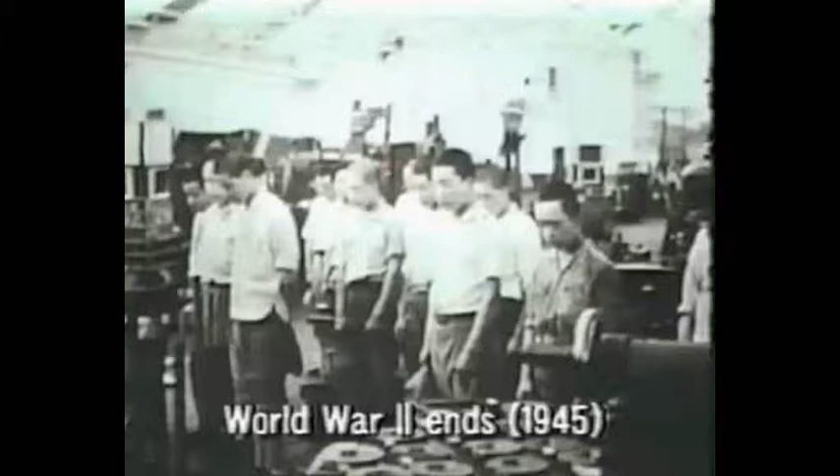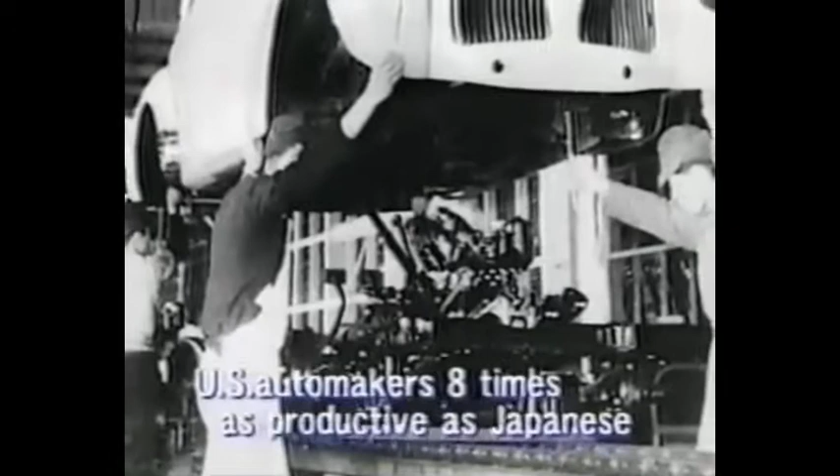After the war, Kiichiro passed on his dream to his cousin Eiji. He instructed Eiji to bring the company up to U.S. standards of technology within 3 years. That was a daunting task. U.S. productivity in automobile manufacturing was 8 times higher than Japan's, and Toyota was short of equipment and capital.

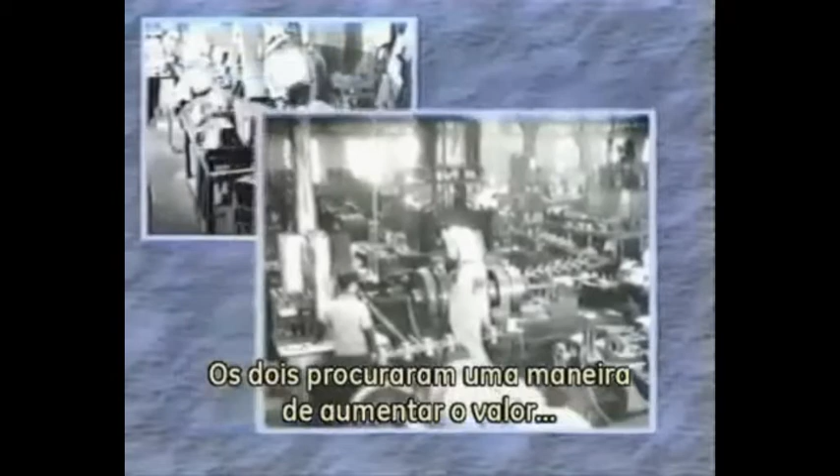So raising productivity was a pressing issue. Eiji assigned a machine shop manager by the name of Taiichi Ohno to develop a more efficient production system. The two men looked for ways to raise the value-added productivity of every worker. They did that by putting Sakichi's Jidoka concept to work throughout their operations.

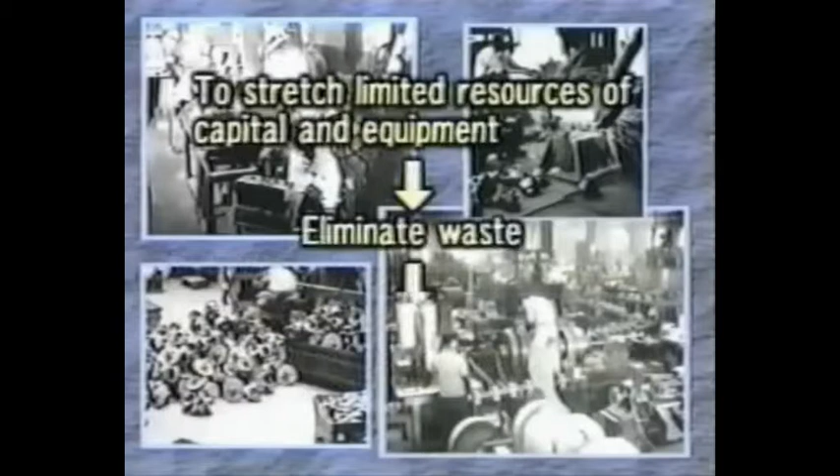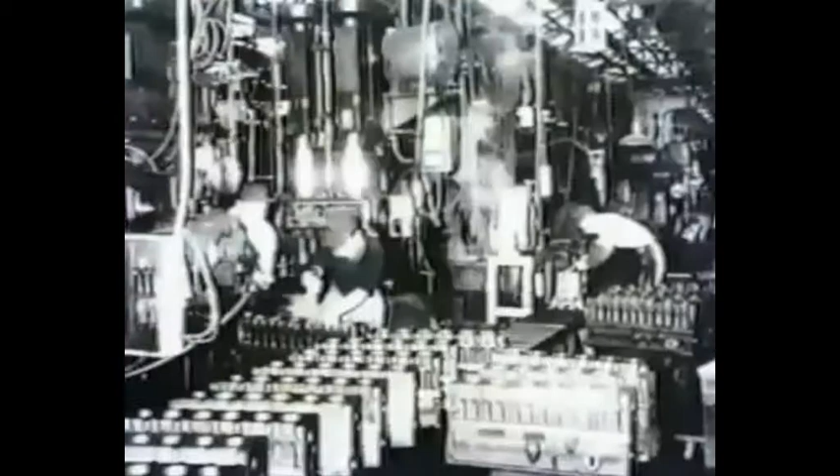They also looked for other ways to stretch their limited resources of equipment and capital. They did that by putting Kiichiro's just-in-time concept to work systematically. Ohno took a cue from the U.S. supermarket. He made each process the customer for the preceding process.

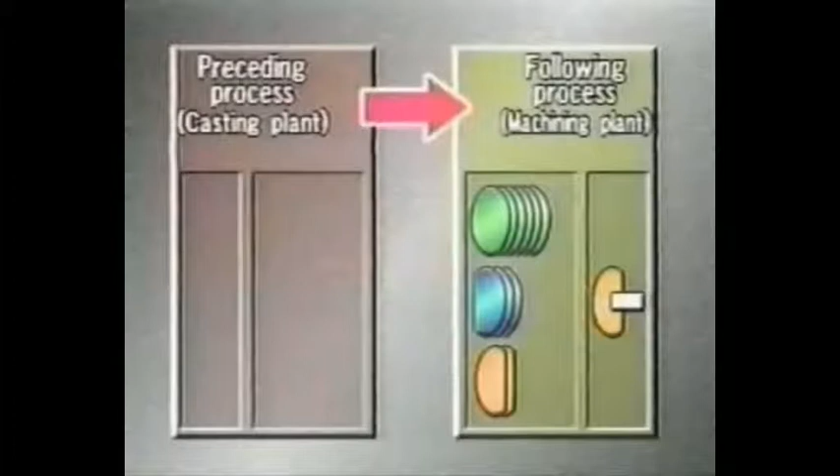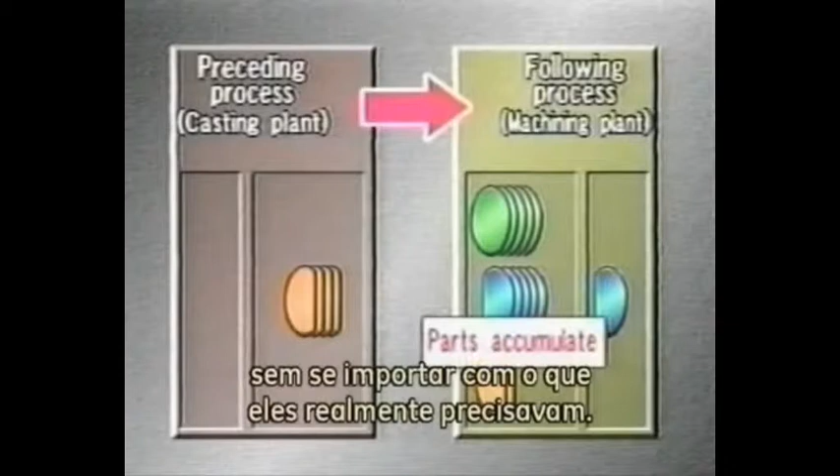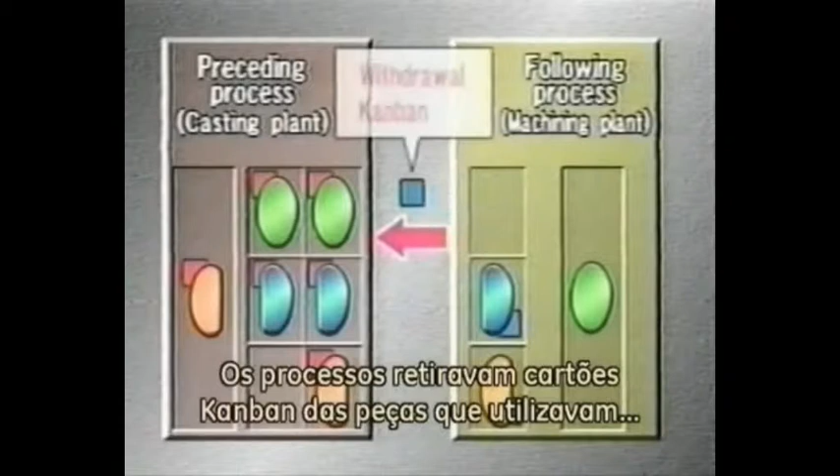In traditional manufacturing, processes delivered parts to the following processes regardless of what was actually needed. Ohno devised a completely new kind of system. Processes used Kanban cards removed from parts they had consumed to withdraw parts from the preceding processes.

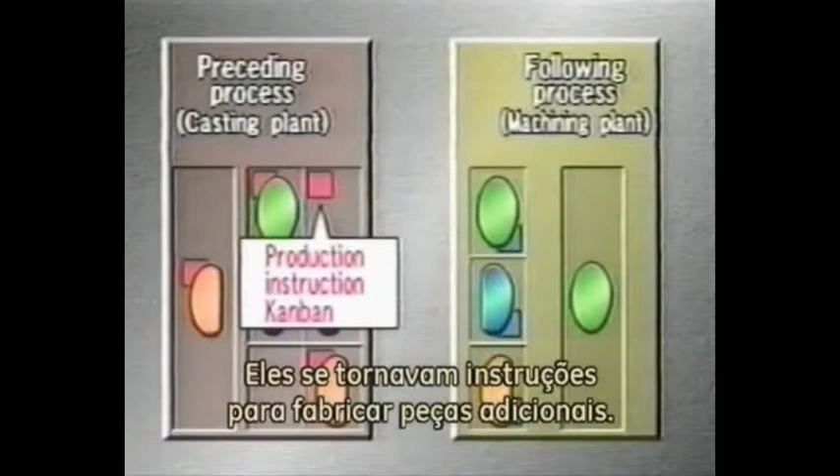Kanban on the parts arrayed by processes came off when the following processes withdrew the parts. They became instructions to make additional parts. The Kanban flow ensured that processes made parts only to replace parts actually consumed by the following processes.

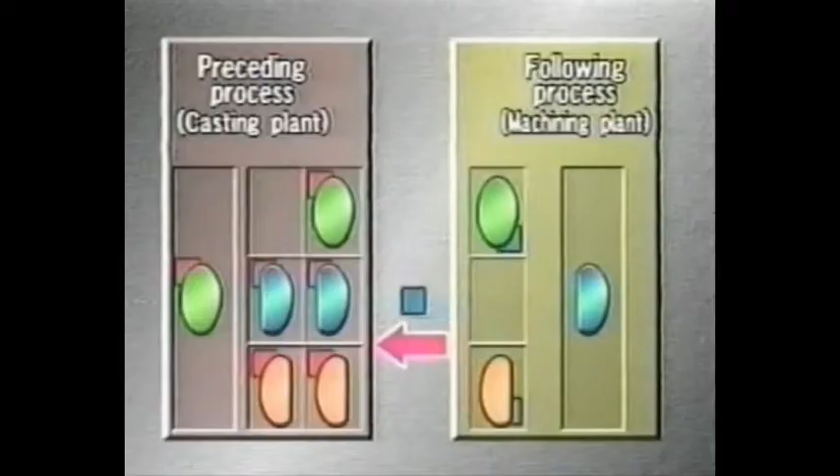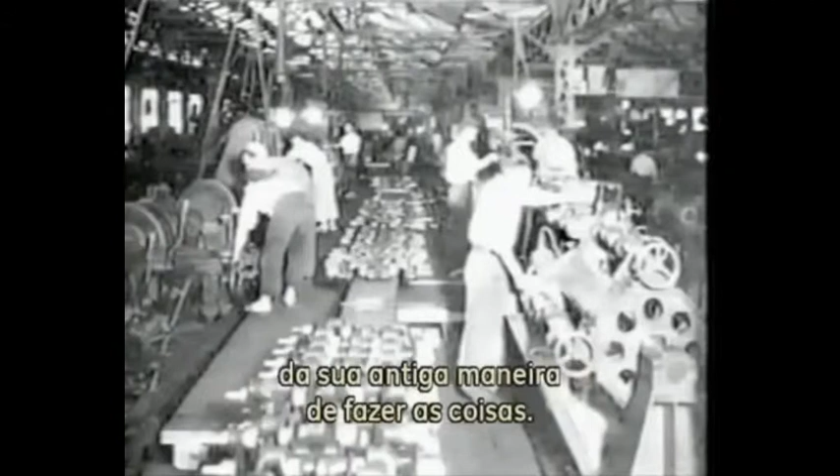Active cooperation by the people in the workplace would be essential to Ohno's system. But at first, people were reluctant to give up their old ways of doing things. Ohno took the initiative. He went into the workplace and taught people how to use his system. Eiji Toyota supported Ohno enthusiastically in putting the new production system in place.

A new production system gradually took shape on the foundation of just-in-time manufacturing and Jidoka intelligent automation. As the Toyota production system, it became a standard for manufacturing industries. The Toyota production system gained global attention after the oil crisis of 1973. Toyota recovered more quickly than other automakers from the crisis, and its production system received much of the credit for that resilience.

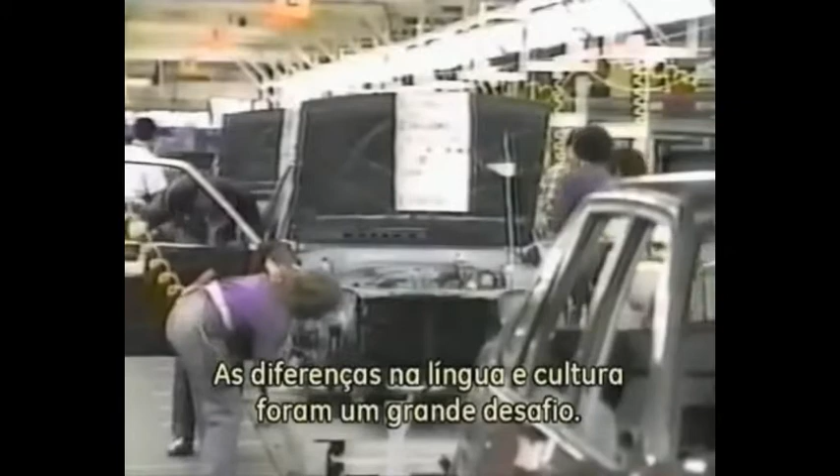General Motors Corporation approached Toyota about setting up a joint venture to make small cars in the United States. The two companies set up New United Motor Manufacturing Incorporated in California in 1984. Differences in language and culture presented big challenges, but the spirit of making things well knows no borders.

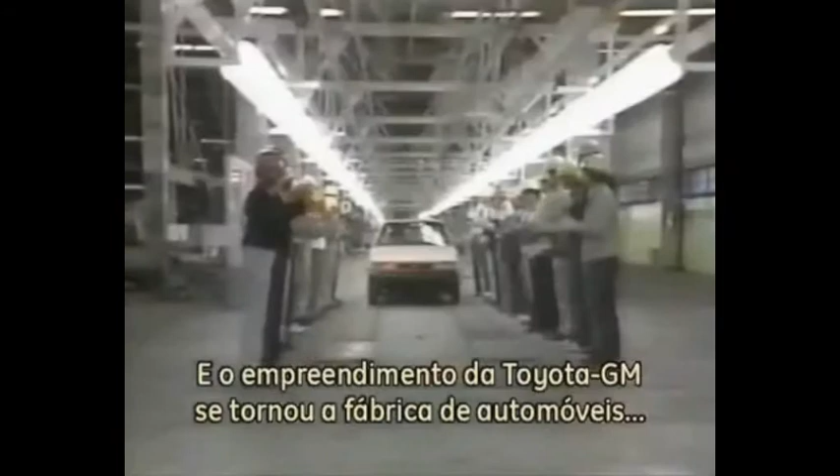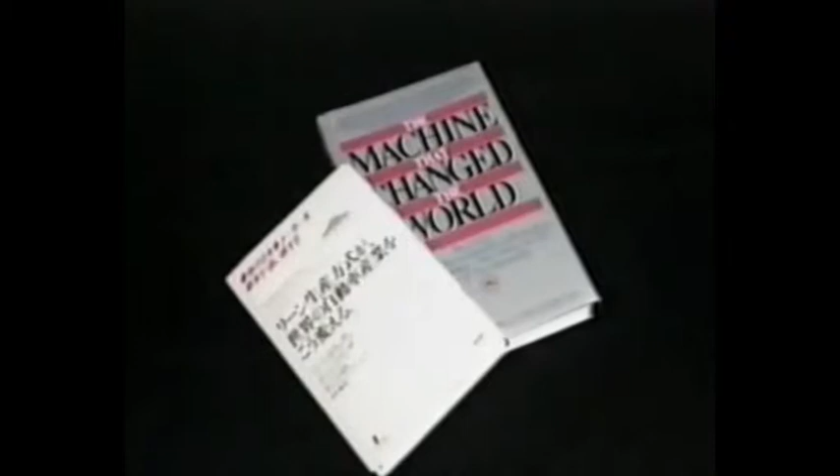People accepted the Toyota production system, and the Toyota GM joint venture became the highest-ranked automobile plant in the United States for quality. It became a symbol of successful industrial cooperation between Japan and the United States. A book published by the Massachusetts Institute of Technology hailed the Toyota production system as the machine that changed the world.

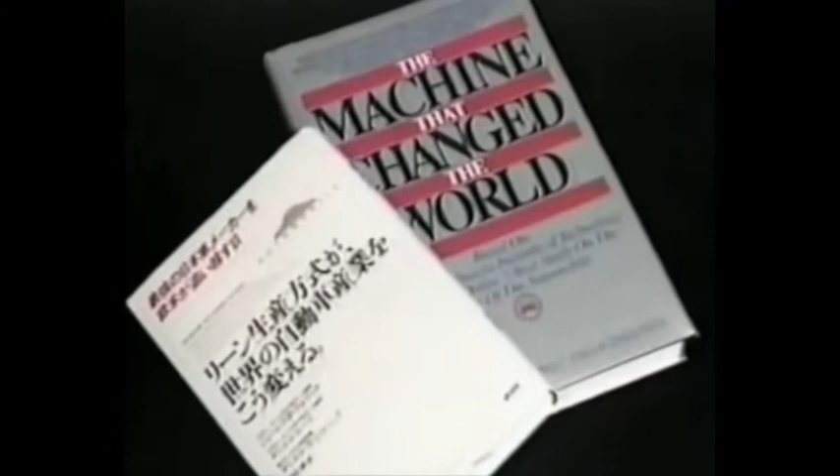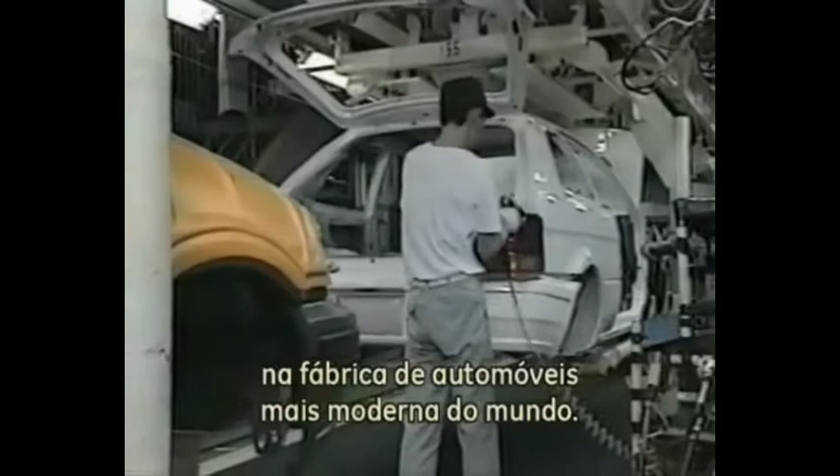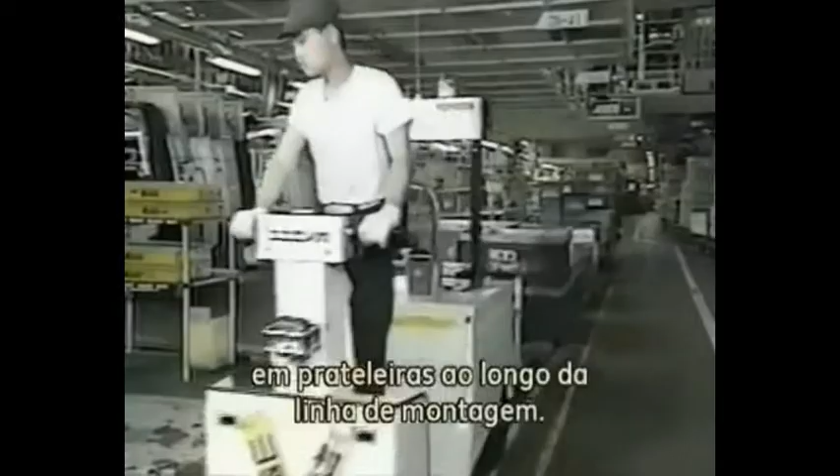Today, the Toyota production system has gained a worldwide following. Let's see how the system now operates in the world's most modern automobile plants. The trucks that deliver parts to the plants carry a variety of items in each load. That allows each truck to travel fully loaded, which minimizes trips and thus reduces traffic congestion. Forklifts carry the parts unloaded from the delivery trucks to racks alongside the assembly lines.

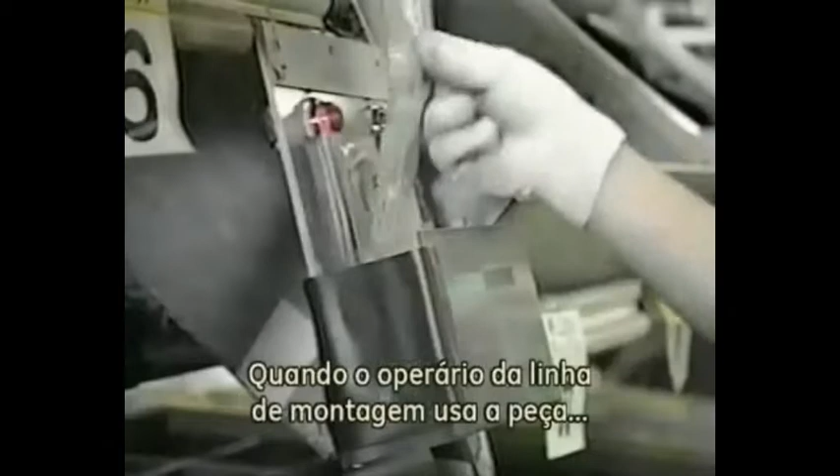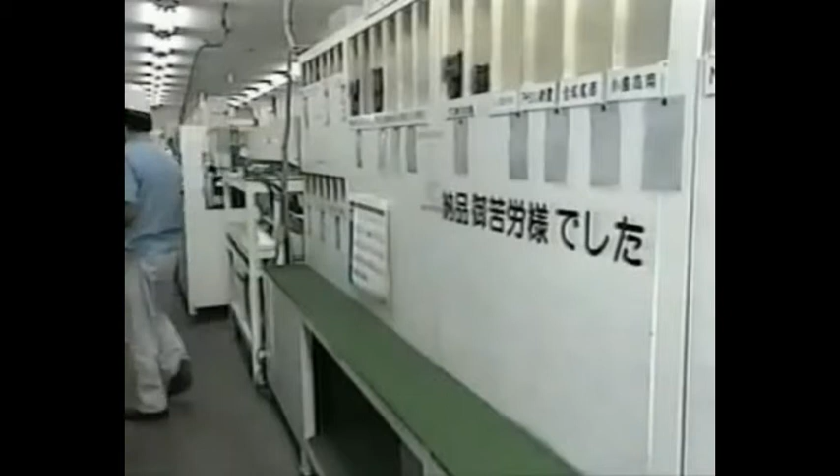When people on the assembly line use the parts, they remove the attached Kanban cards. The Kanban get picked up regularly and sorted. The delivery truck drivers pick up the Kanban for their company or companies before leaving. Back at the supplier's plants, the Kanban become orders for withdrawing additional parts. Sorting arranges the Kanban according to area in the plant. Shipping personnel exchange the Kanban and empty boxes for full boxes.

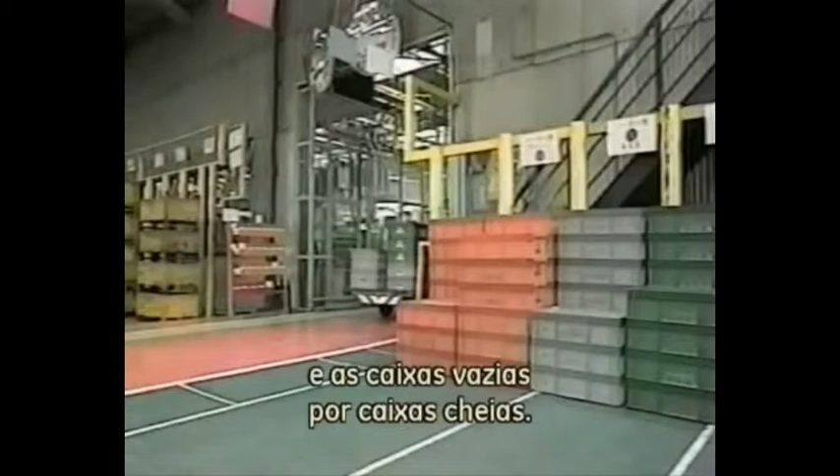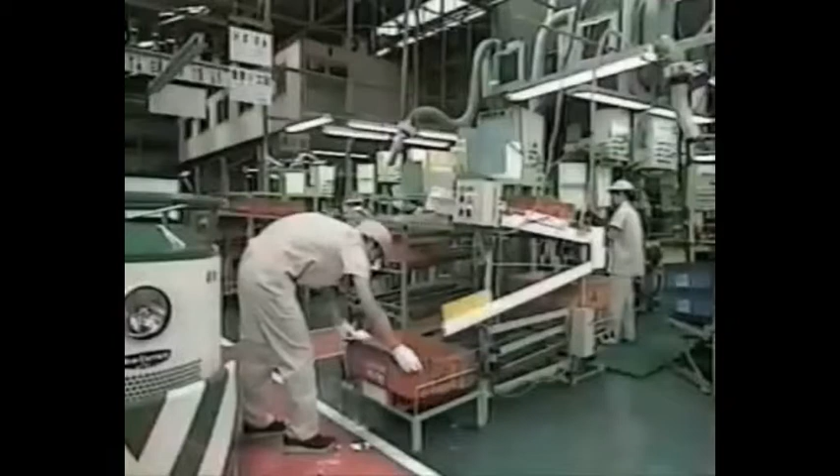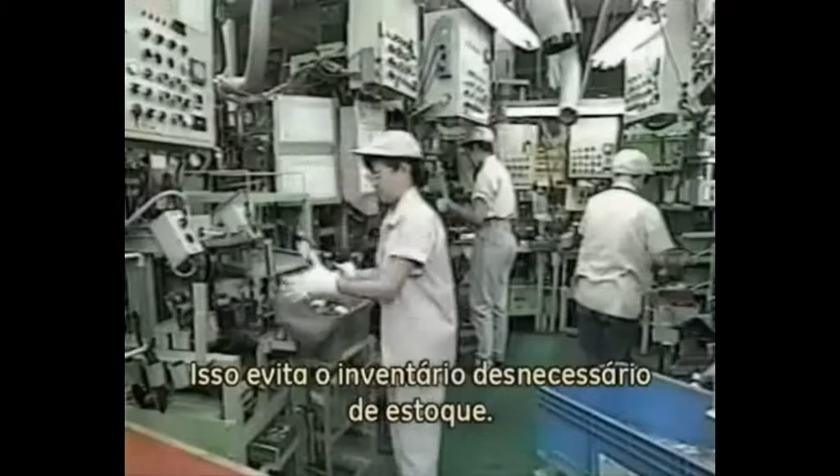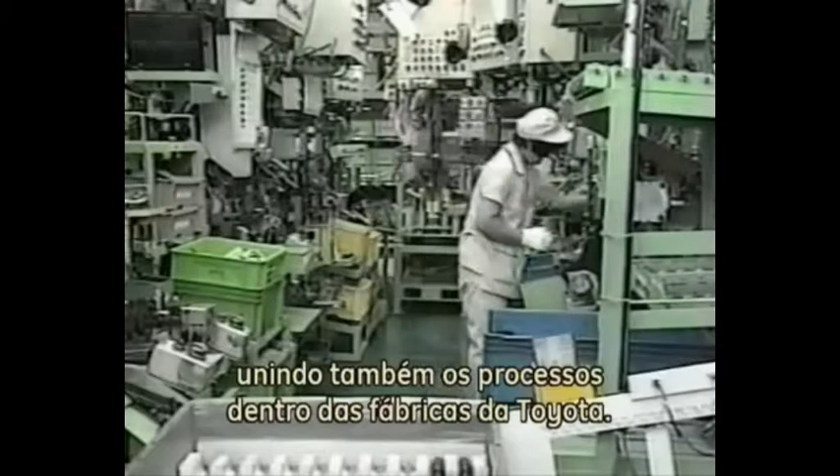The production processes in the plant make additional parts only to replace parts that have been withdrawn. That prevents the wasteful buildup of inventories. When the shipping personnel have gathered a full truckload of parts, a truck carries the parts to the vehicle plant. Kanban thus link Toyota plants with suppliers' plants, as well as linking the processes inside the Toyota plants. Just-in-time manufacturing minimizes inventories, eliminates waste, and maximizes productivity at all the plants that participate in the Toyota production system.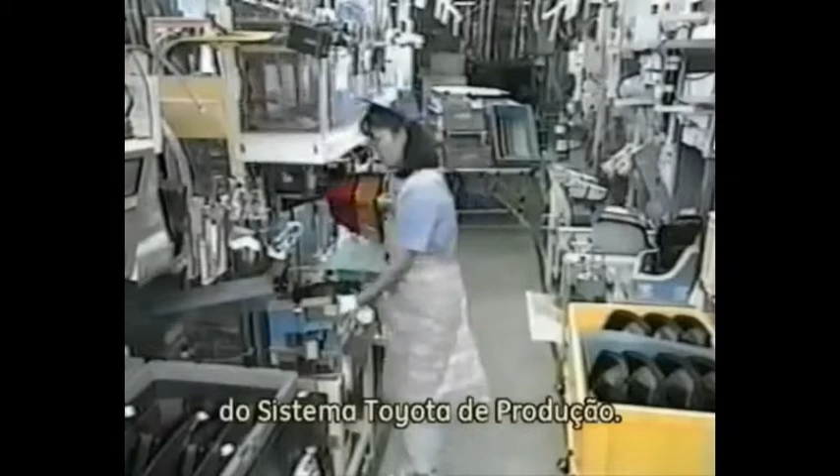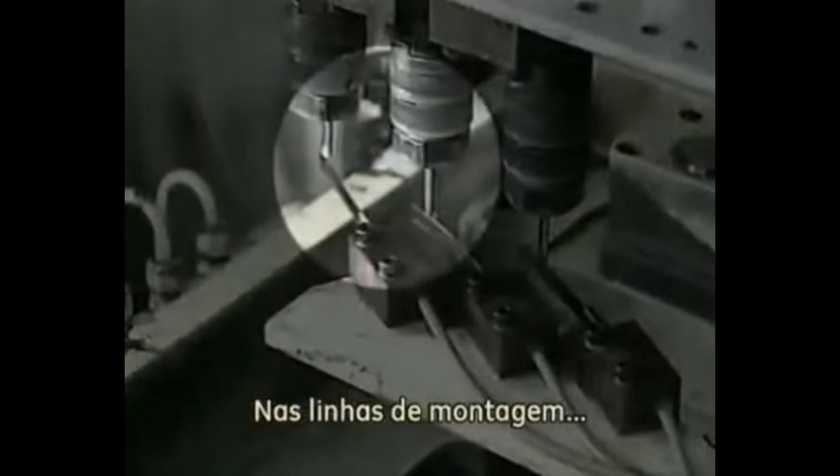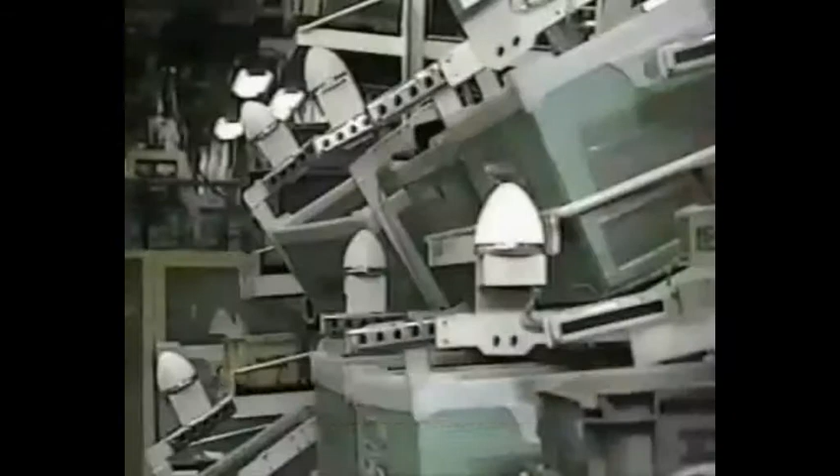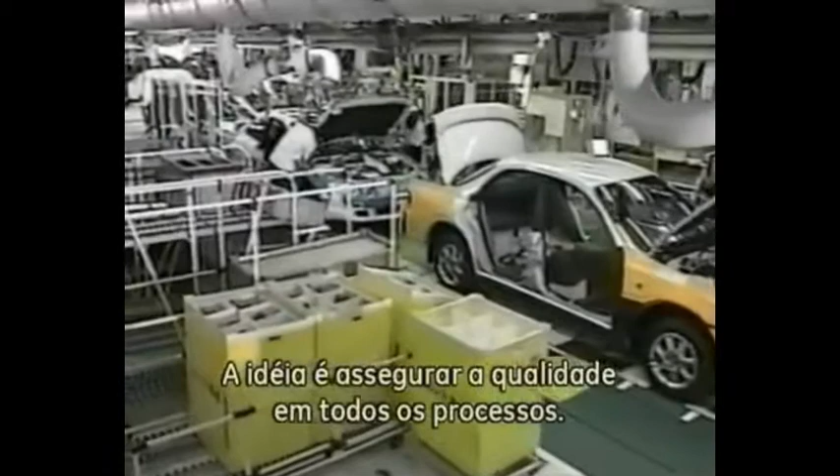Jidoka intelligent automation also continues to play a big role in the system. On automated machining lines, andon lamps light up to call attention immediately to any problems detected by sensors. On assembly lines, the employees themselves have devised countless Jidoka measures to prevent defective work. So Sakichi's concept continues to prevent waste. The idea is to build quality assurance into every process, and it works.

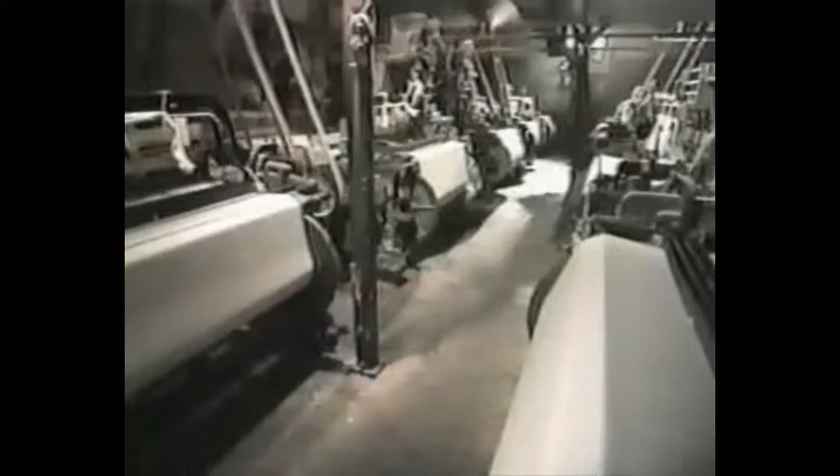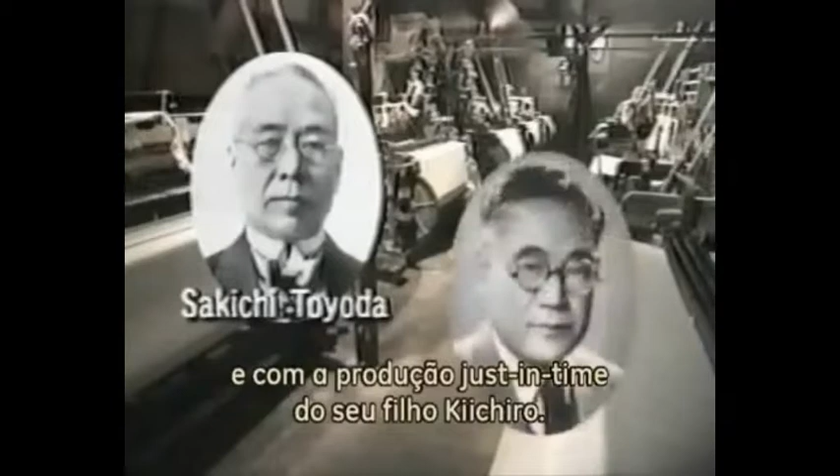The foundation for the Toyota production system has been established by Sakichi's Jidoka intelligent automation and his son Kiichiro's just-in-time manufacturing. Taiichi Ohno and others put those concepts to work systematically with the strong support of Eiji Toyota and his passion for manufacturing.

The Toyota production system continues to evolve in response to changing needs and circumstances, but the fundamental concepts are eternal, including Toyota's commitment to continuing improvement in every phase of products and operations. Those concepts underlie a lasting contribution to enhancing the quality of life for people everywhere.